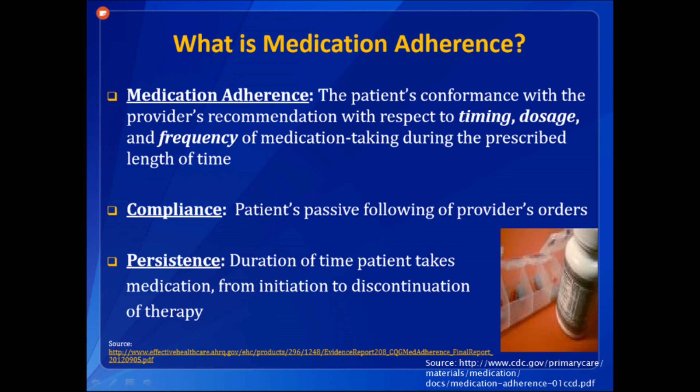And I came across this interesting article done by the CDC, and it talks about prescription noncompliance, which is when the patient either forgets to take their prescriptions or they don't follow the doctor's orders, and this causes major problems. In the US alone, it kills up to 125,000 people per year and costs over $289 billion.

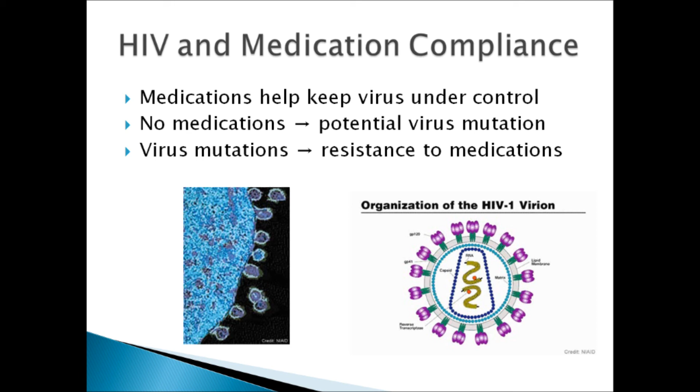And for example, a person with HIV, if they forget to take their medication or they don't follow their doctor's orders, the virus is able to mutate and can become resistant to their prescriptions, and the prescriptions won't work anymore. So they have to go and get new prescriptions that are generally more expensive and they aren't as effective, and it's just a great big hassle for everybody.

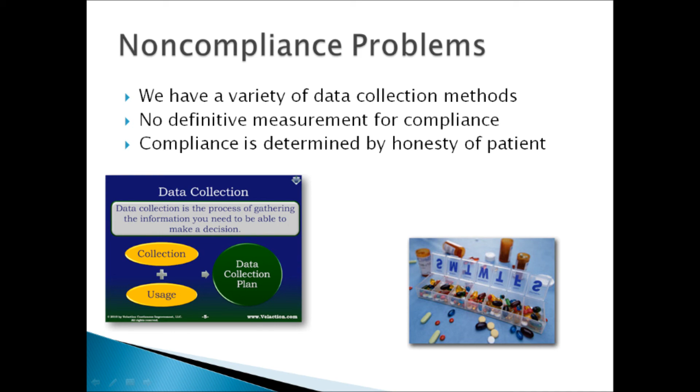As I dove deeper into the problems surrounding prescription noncompliance, I noticed that we have all kinds of quantitative data collection methods around us, but we have nothing to measure compliance. Compliance is based solely upon the word of the patient when they tell their physician whether or not they're taking their medications. But the problem is, research shows that about 40% of the time, patients lie to their doctor. So it's not a very valid source of information to measure compliance.

Another problem surrounding prescriptions can best be summed up by an experiment done by a New York Times medical writer. She gave a group of medical students each 2 boxes of Tic Tacs, and they were told to treat them as medications with specific prescriptions. And throughout the week, they were supposed to take them as they would any other medication.

But the problems arose when they returned 1 week later, and the writer noticed that none of the students were able to properly follow the medications perfectly, showing that there needs to be some type of reminder method to keep patients on track with their medications.

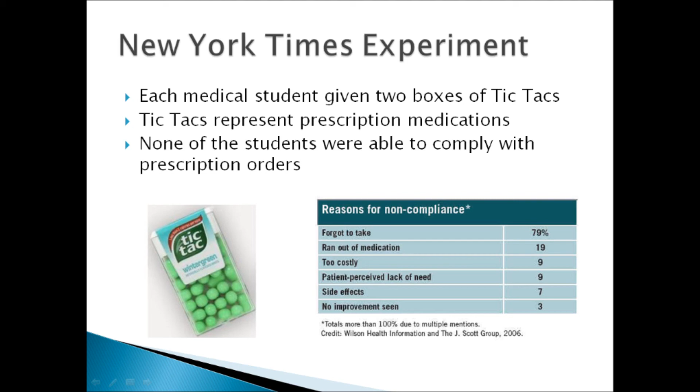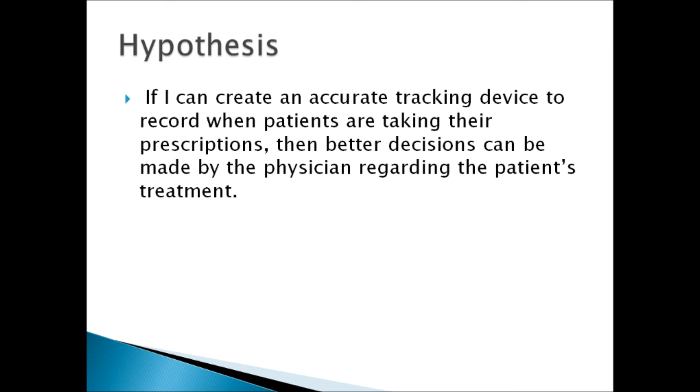Based upon all the problems I've found throughout my research regarding prescription noncompliance, I therefore inferred that if I can create an accurate tracking device to record when patients are taking their prescriptions, then better decisions can be made by the physician regarding the patient's treatment. I decided that the best solution for these problems would be a redesign of the simple pill bottle. While other medical technology has evolved throughout the years, the pill bottle has remained relatively the same.

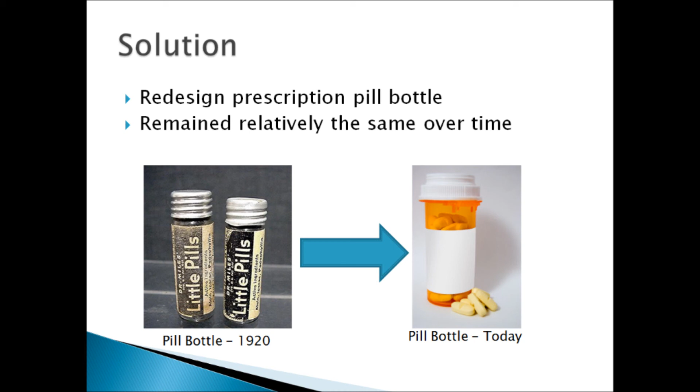I thought about various aspects that would benefit the new pill bottle for both the patient and the physician, such as reminders for patients to take their medications. Pill dispensers exist currently to remind the patient when to take their medication, but they're not designed for normal citizens. They're mainly designed for senior citizens. They're not portable, and they're not very practical either.

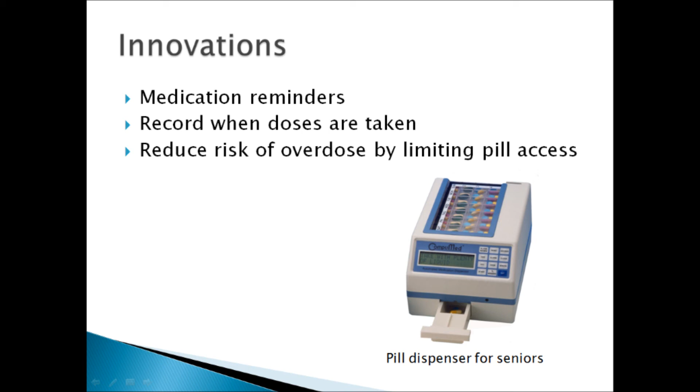I thought it would be important to record when the dose is taken so that the physician has information regarding future treatment decisions. And I also thought it would be important to limit the number of pills dispensed to reduce the risk of overdose, saving more lives. I used my engineering and programming background to take these ideas and develop them into a single streamlined design.

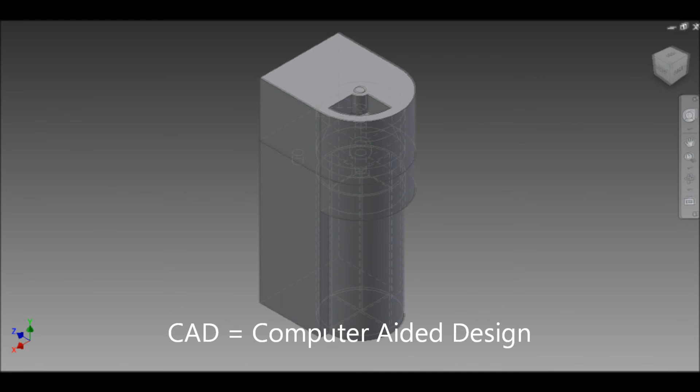So here we have the CAD files for the various components of my smart bottle design. Here's an overall view of the entire model. It's comprised of 4 pieces, and here's a view of the entire model showing the internal edges and curves to show the complexity of the design. And now we'll go into each of the individual parts to explain their design and functions.

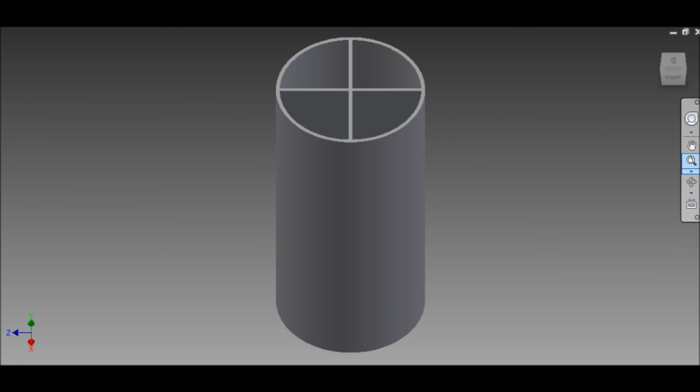Here we have the base of the smart pill bottle. It acts very similar in function to a regular pill container. Basically what this part does is it contains the pills and holds them and organizes them. The 2 dividers divide the pills into 4 quadrants, making sure that the pills are orderly and organized so they can be dispensed properly without jamming the mechanism.

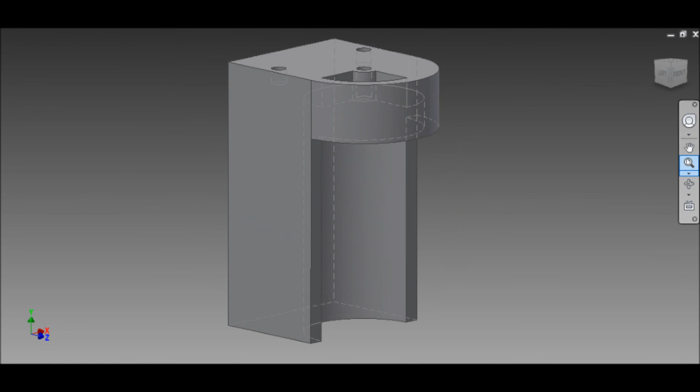This component is the external mechanism. It wraps around the pill container. It contains the electronic and motorized components and also connects the lower pill container to the upper dispensary part that will hold the pill for the next dose.

Here's the rotational door mechanism. It is connected to a servo motor, which opens and closes when it is time to dispense the pills. The purpose of this mechanism is it is able to open to hold the next pill, it is able to close to hold the pill for safekeeping until the next dose time, and when it is time to take the dose, it can open, allowing for the patient to receive their medications.

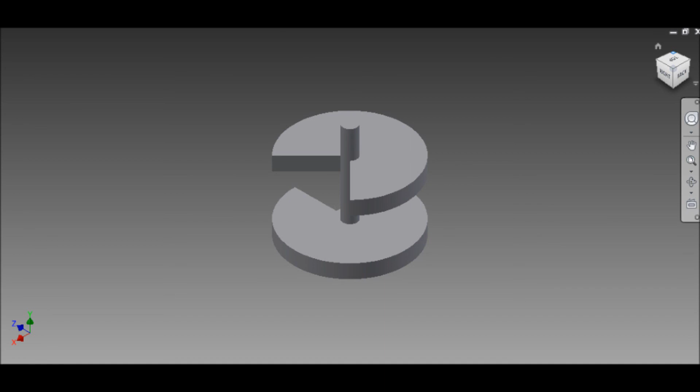The final component here is the upper component, which basically caps off and seals the spinning door mechanism and connects it to the lower base mechanism, bringing the whole smart bottle together. So now that we have evaluated each of the individual components of the smart bottle, we can see how the entire mechanism works together. The pill containment part holds the pills until it is time to load for a dose.

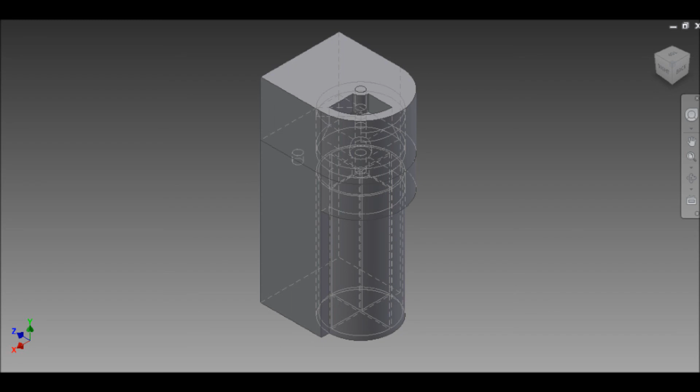When it is time to load for a dose, the door on the mechanism opens to the loading position and the patient turns the whole bottle upside down until a pill falls into the door area. Then the mechanism spins, locking the pill off from the pill containment area and the access area for the patient. When it is time to take a dose, the patient presses the button, the door spins again, and the patient has access to their medications. The entire process repeats to load for the next pill.

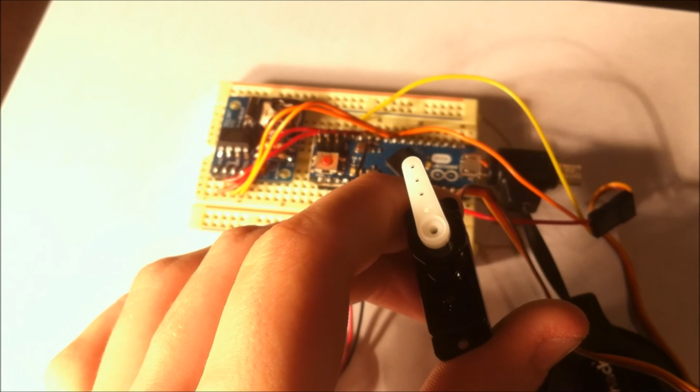The patient will then push this momentary switch right here, which will send the program, causing this servo motor to turn, opening the pill bottle, allowing the patient to take their pills. The patient will then press the pill bottle button again. The servo will switch to the loading position. The patient will tip the bottle upside down, and then the patient will press the button again, turning the mechanism, locking the pill for the next dose.

So now the program is running currently on the Arduino. The RTC clock right here is counting up until it is time to take the dose, constantly notifying the Arduino what time it is, and when the Arduino discovers that it is time for the patient to take their dose, this alarm will sound, just like that. So I'm notified to take my dose.

So as the patient, I will push this button, signaling I'm ready to take my dose. I push this button, and the servo motor will open to the open position. I am able to tip the pill bottle upside down to receive my medications. Once I am ready, I will push the button, and it will move to the loading position where I can tip the entire bottle upside down. To load the next medication, I can press the button, and the entire mechanism moves to the closed position.

The time I have taken my dose is recorded in the hard drive on the Arduino, and the RTC clock begins to count up until the next dose needs to be taken. So now we've been running the pill bottle, and now we are able to extract the data. So we have connected the pill bottle electronics by a USB cable to establish a serial connection with our computer.

And by using the data stored on the pill bottle, we are able to, over a serial connection, extract the times when the doses were taken. So we can see here that we had a dose taken at 2:16 p.m. on May 16th, 2014, a dose taken at 2:23 p.m. on May 16th, and we had a third dose taken on May 16th at 2:30 p.m. So we can see that the patient took 3 doses 7 minutes apart.

So this proves that the electronics are working and the programming is viable in storing and holding the data of when the doses are taken. To get my prototype ready for the everyday patient, I would follow the typical design cycle for developing a product. I would first take my CAD files and develop a physical prototype in which I could integrate the electronics and mechanical components together and add the programming code. I would continue this cycle until I believe I have an optimized design ready for testing.

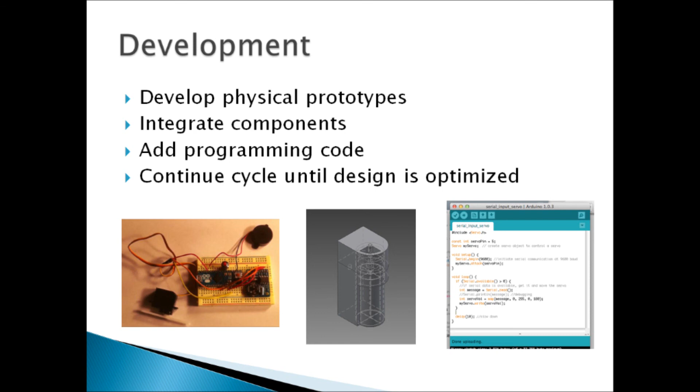Once I have a finalized design, I would begin clinical testing to determine the efficiency of my new pill bottle. I would perform an experiment with a group of patients to determine how efficient my new pill bottle is. The patients would have prescriptions from a doctor, and I would give them the control baseline first, where they would have a normal pill bottle and they would go throughout a week adhering as best as they can to their prescription orders.

After the week is over, I would take the data from when they took their prescriptions and I would introduce the variable. Each of the patients would receive my new smart bottle, and they would follow the exact same regimen, except they would use the new smart bottle to adhere to their prescriptions. After the week is over, I would take the data and feedback from both the patients and the physicians to use all that information and bring it together to streamline and finalize the total design.

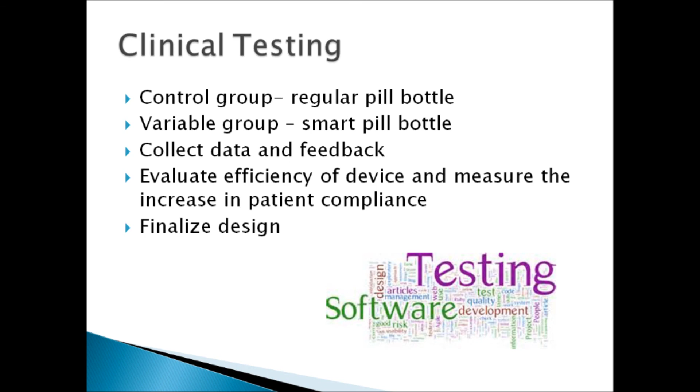Just like any other new technology, the smart pill bottle would have a few problems to overcome before it could reach every patient. The first problem I could see would be the cost. Obviously, the smart pill bottle would cost a bit more than a regular pill bottle due to the introduction of electronic components and microcontrollers.

However, over time, the price would decline due to new technologies, and by producing more and more smart pill bottles, production costs would decrease. Also, I believe that the hundreds of thousands of lives saved and the billions of dollars not spent on prescription non-compliance would greatly offset the cost increase.

Another problem I could see would be the new size of the pill bottle. The electronic components might take up a bit more space than a regular pill bottle, making it a bit more of a hindrance to use than a normal pill bottle. However, the size would decrease over time due to advances in foldable circuitry and smaller batteries, making it not much of a problem for the patient.

The final problem I could see would be the battery life. If the battery runs out, then the patient might not be able to use the pill bottle to get their medication. But there are new technologies such as kinetic regeneration, or we could use solar power to recharge the battery, allowing the patient to use the pill bottle whenever or wherever they want to use it.

If we are able to overcome the problems associated with the development of a smart pill bottle and we are able to implement it into modern medicine, the benefits and implications would be immense. One of the biggest benefits of this new technology I can foresee would be no more guessing about the effectiveness of patient treatments. For example, let's take a patient who has pneumonia.

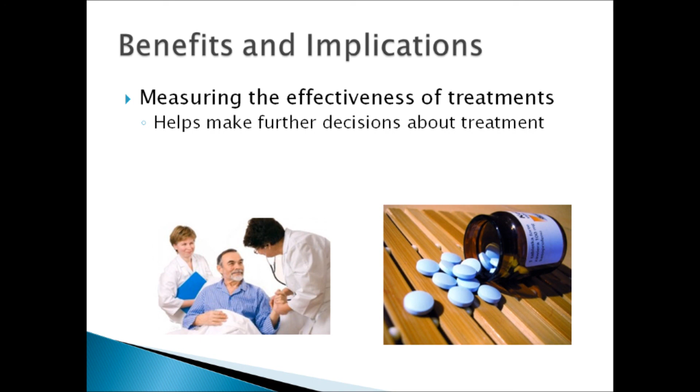Another benefit of the new smart bottle would be greater control over high-risk medications such as narcotics. Narcotics such as OxyContin, Percocet, and Vicodin cause up to 15,000 deaths per year in abuse and overdosages. However, the smart bottle would lower the risk of overdosage and medication abuse by restricting access to the medication only to when the doctor has prescribed for the medications to be taken.

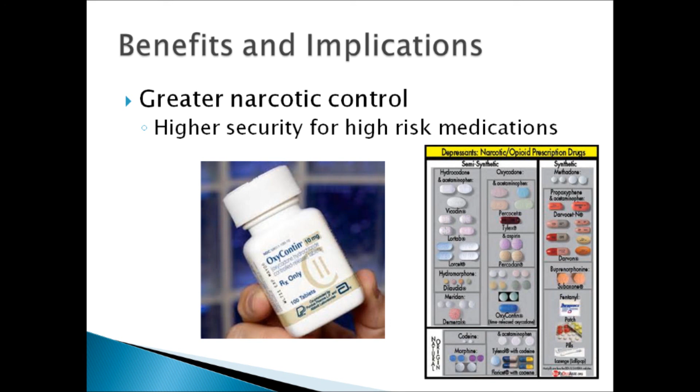And other technologies such as a fingerprint scanner could be implemented for higher security, ensuring that only the prescribed patient is able to take their medications and limiting access to those the medication is not prescribed for.

Another application: the data collected by the smart bottle could be used by health insurance companies when calculating health insurance premiums. The data could be used to determine the risk of a patient when they're taking their medications, and by gauging their compliance ratings, health insurance companies could use this data to create another metric when evaluating health insurance premiums.

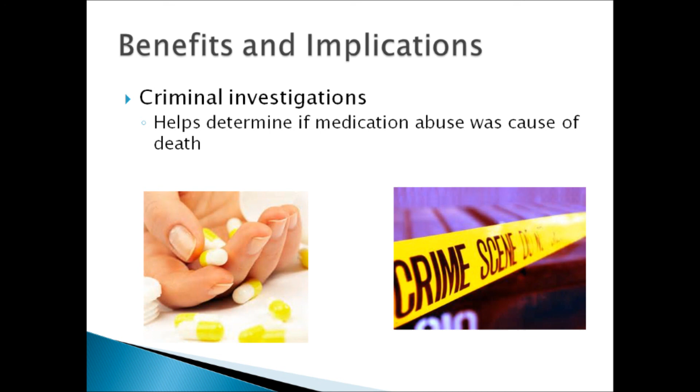Criminal investigators could also use the data stored on a smart bottle when trying to determine the cause of death in an investigation. Data stored on the smart bottle could be a valuable source of information when trying to determine whether medication abuse was a cause of the person's death.

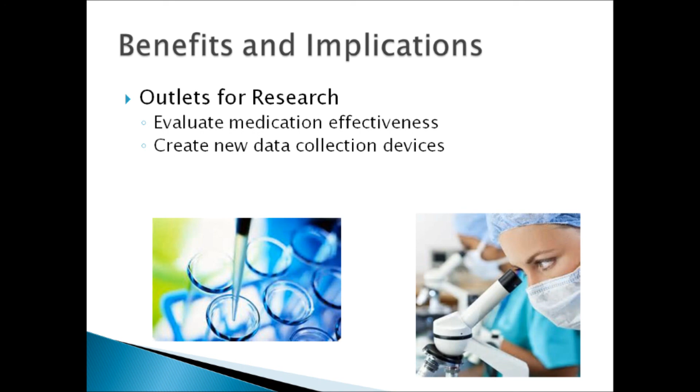Finally, researchers can use the data collected by smart bottles to determine further outlets for research. By using the data collected by the smart bottles and gathering information from physicians, researchers can determine what medications are still effective at combating diseases and what diseases need new medications to control them. These are just a few of the benefits and applications of the smart bottle, and over time, more implications will become clear to researchers, patients, and physicians.

In conclusion, the smart bottle is a fairly simple solution to solving the widespread problem of prescription noncompliance. Its implementation into medicine would have instant benefits for both the physician and the patients, and most importantly, the smart bottle would save billions of dollars and save hundreds of thousands of lives.